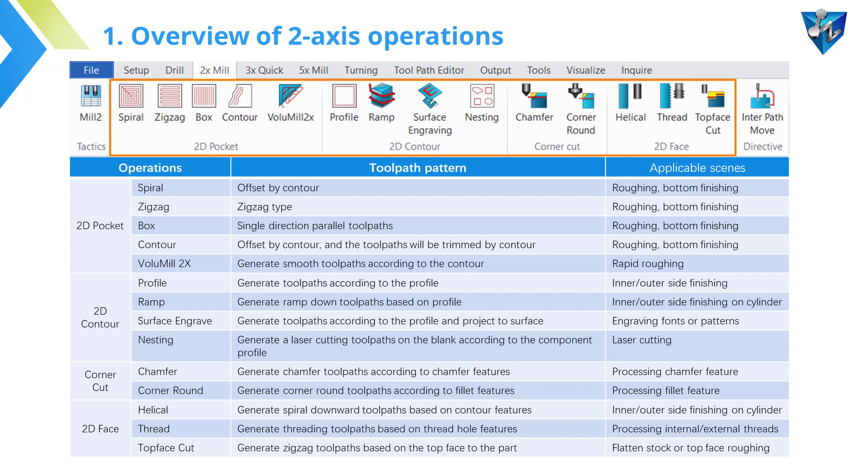In the second chapter, I will introduce the toolpath patterns of ZW3D 2X-CAM. The first category is 2D pocket operations: spiral, zigzag, box, contour, and VoluMill 2X. Most of them are applicable for 2X roughing and bottom finishing, and VoluMill 2X is only for 2X roughing.

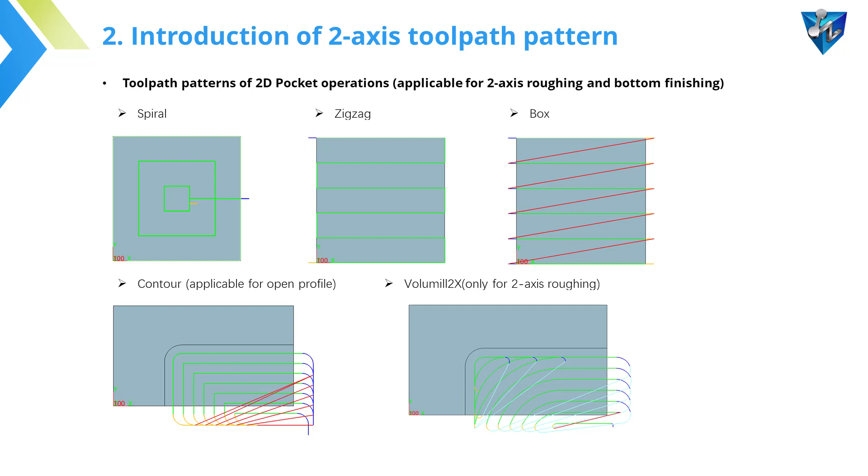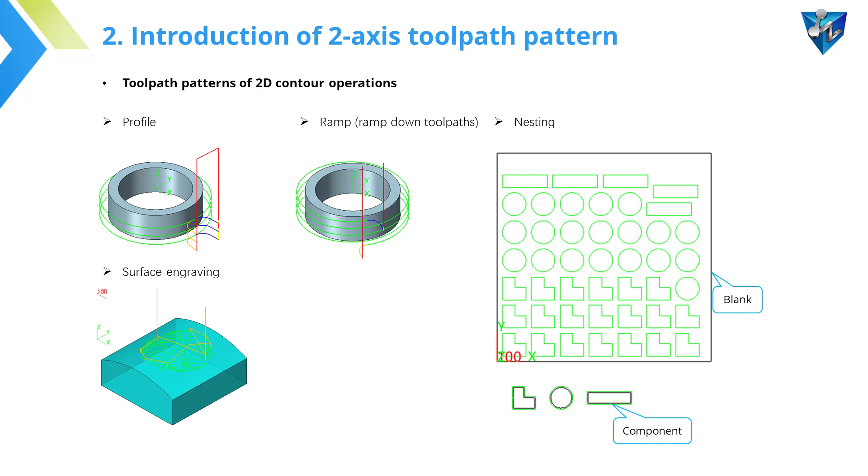The second category is 2D contour operations: profile, ramp, nesting, and surface engraving. Then the last 2 categories are corner cut operations, which contains chamfer and corner round cut, and 2D face operations, which contains helical, thread, and top face cut.

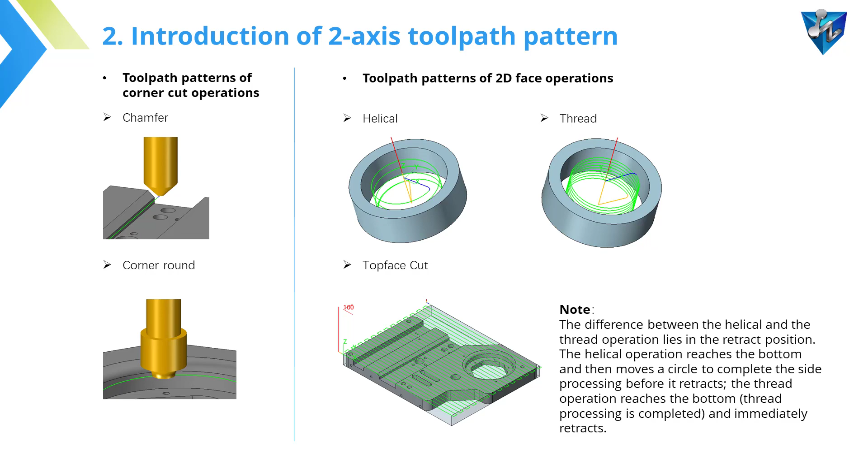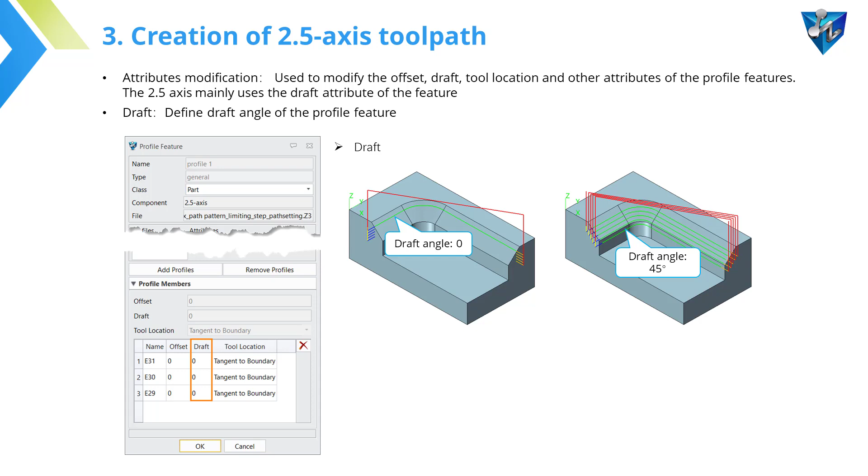In the third chapter, I will introduce how to create a 2.5-axis toolpath in ZW3D. It's achieved by modifying the attributes of the profile features. Now let's go to ZW3D and introduce the details.

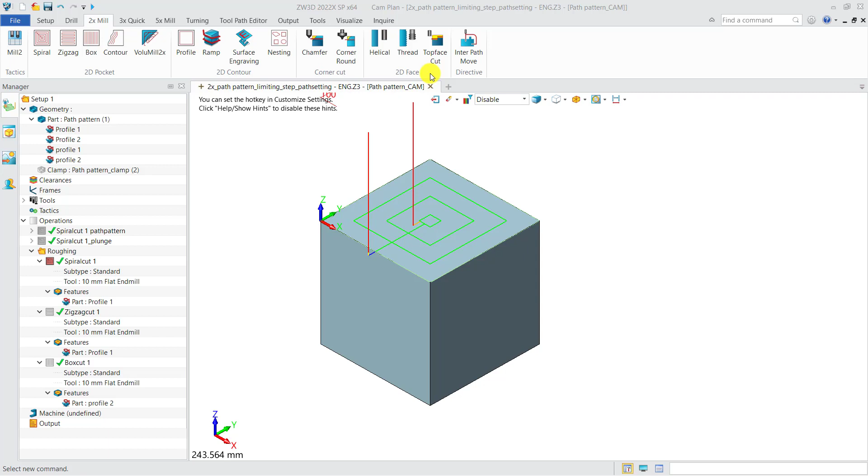These are the operations of ZW3D 2X-CAM. Here are the 2D pocket operations, 2D contour operations, corner cut operations, and 2D face operations. Then I will introduce the toolpath patterns one by one.

First is the spiral cut. It generates the toolpath by offsetting the profile. It can process toward or away from the profile boundary. Just set the toolpath pattern option we introduced before.

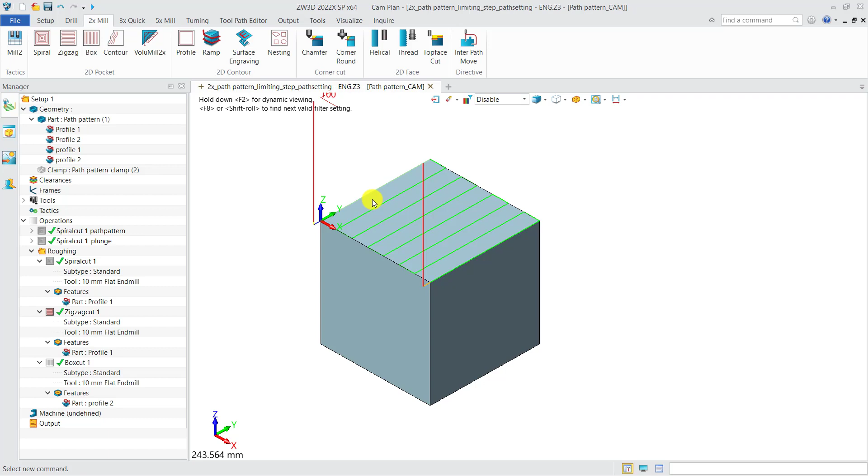Then is zigzag cut. It will generate straight parallel toolpath and process in zigzag shape. And box cut. It will also generate straight parallel 2 pass, but instead of zigzag shape, it will lift tool at the end of every toolpath, then move to the start point of next toolpath.

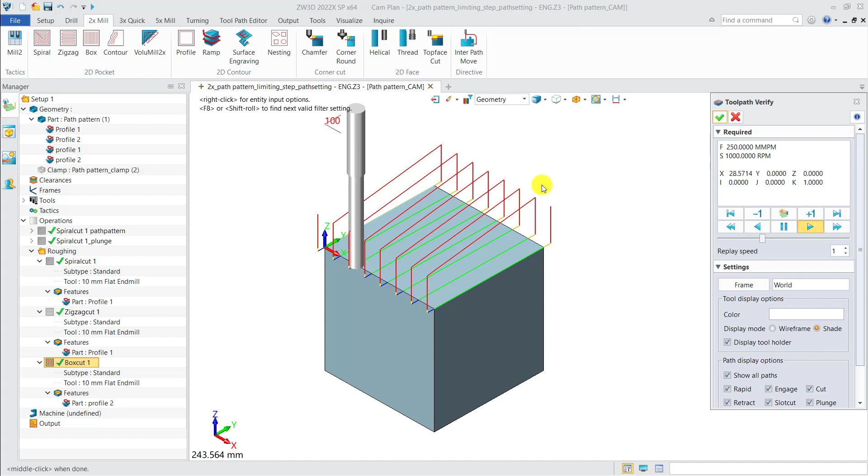Next one is contour cut. It will generate the toolpath by offsetting the contour, and the toolpath will be trimmed by the open contours and generate lead in and lead out toolpath.

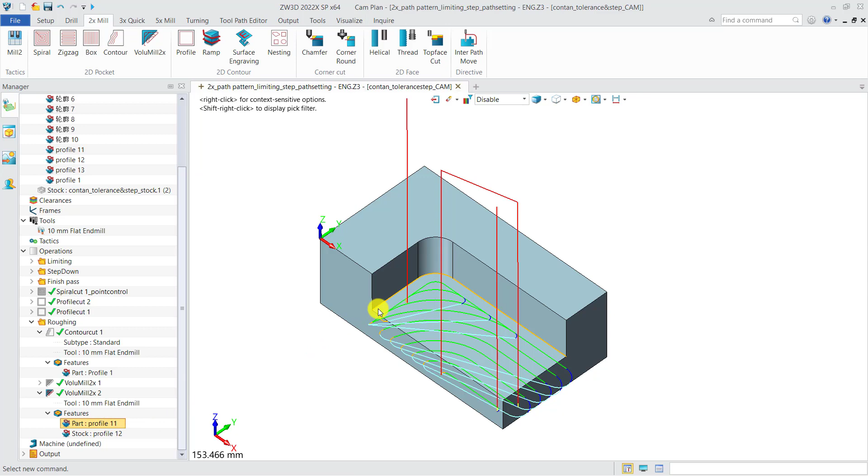And VoluMill2x. It will generate smooth toolpath according to the contour, and according to the parameters recommended by technology expert. Use a large step down to remove material.

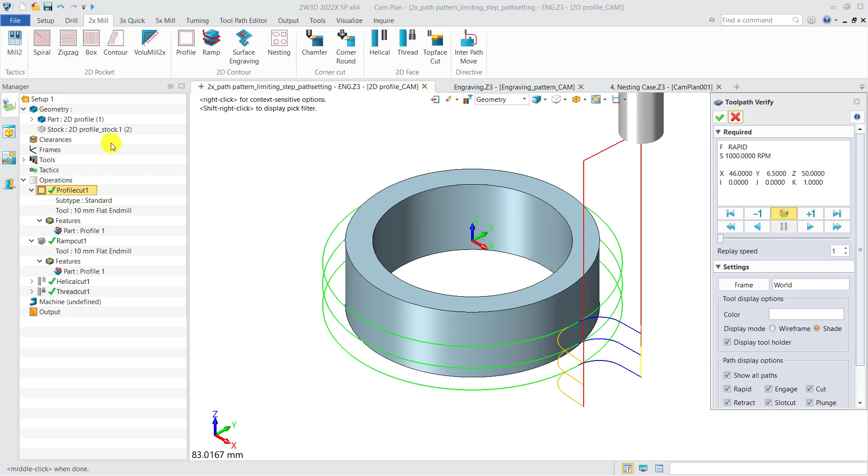Then next category is 2D contour operations. Profile cut will generate the toolpath according to the profile. It has lead in and lead out at every layer, and it is applicable for inner or outer side finishing, because it will process with the tool cutting edge.

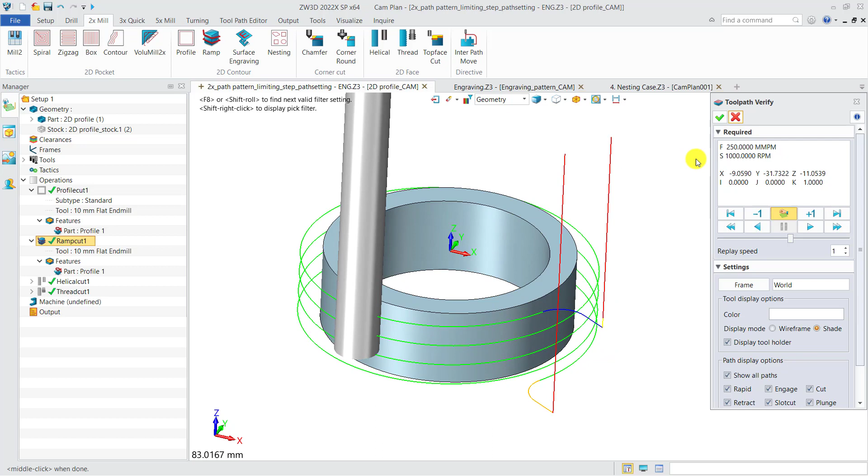Ramp cut will generate ramp down toolpath based on profile, without tool lifting in the middle, and it will also process with the tool cutting edge. It is applicable for inner or outer side finishing on cylinder.

Then the next one is surface engraving. It will generate the toolpaths on the selected profile, then project them on the model surface to generate the engraving toolpaths.

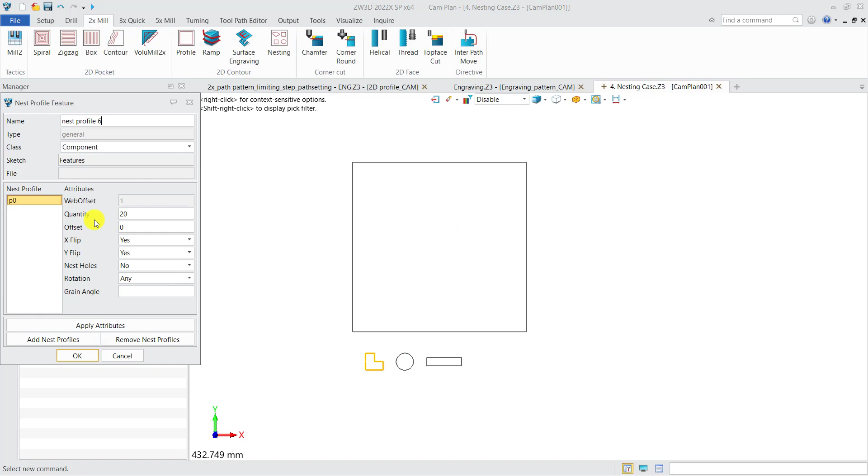And the last operation in 2D contour category is nesting. It will generate toolpaths according to the specified component shape and quantities on the blank feature.

The next category is corner cut. It's mainly used for chamfering and rounding features of the workpiece. First is the chamfer cut.

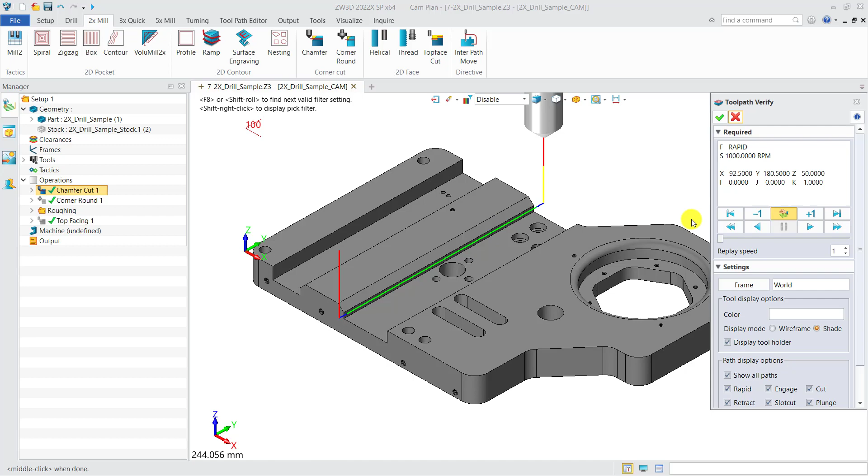We can use Verify to check the effect. It's using the chamfer tool. And of course, it can generate multiple toolpaths. For example, I change the number of cut to 3.

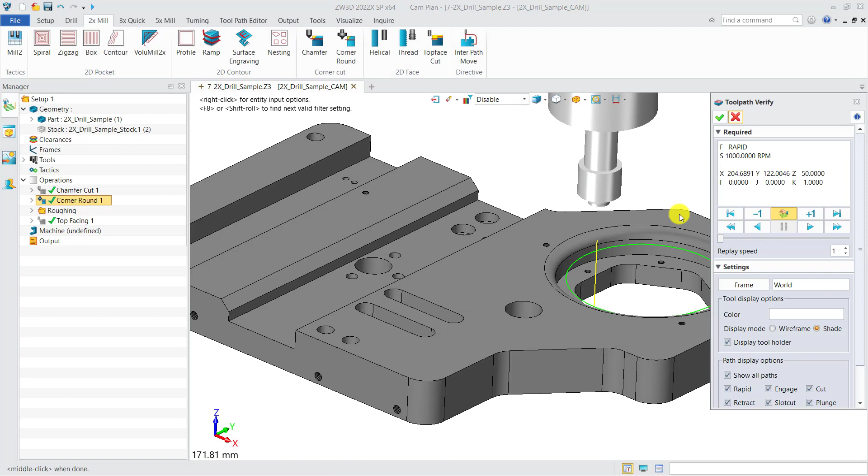Next is the corner round cut. We can also use Verify to check the effect. It's using the corner round end mill to process the fillets.

Then the last category is the 2D face. It contains helical, thread, and top face cut. Firstly, let's look at the helical cut.

It's applicable for inner or outer side finishing on cylinders. The toolpath is actually a helix. The distance between toolpaths in Z direction is defined by pitch value here.

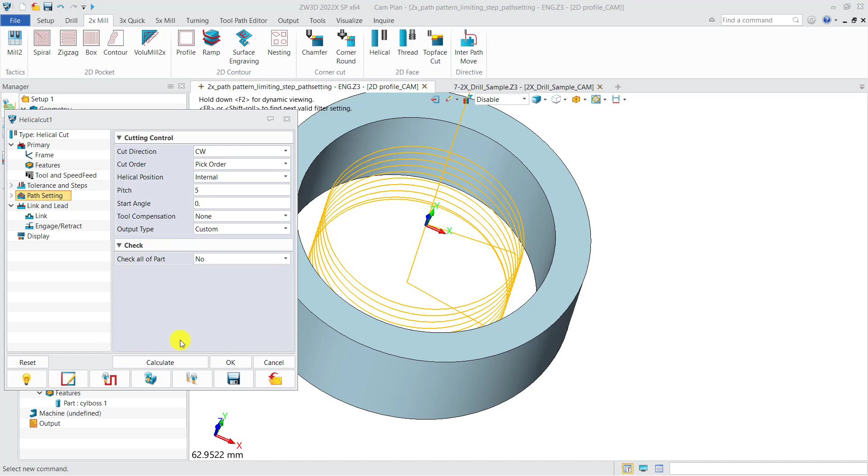Next one is thread cut. As its name suggests, it's used to process the threads. It will generate the toolpaths based on the thread pitch specified in the feature dialog box.

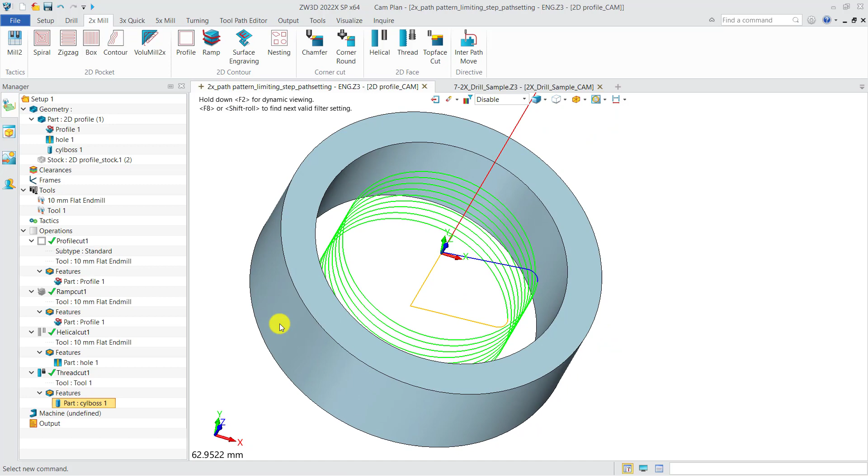These two operations' toolpaths are similar. The difference between them lies in the retract position. The thread operation reaches the bottom, the thread processing is complete, and it immediately retracts. However, the helical operation reaches the bottom and then moves a circle to complete the side processing before it retracts.

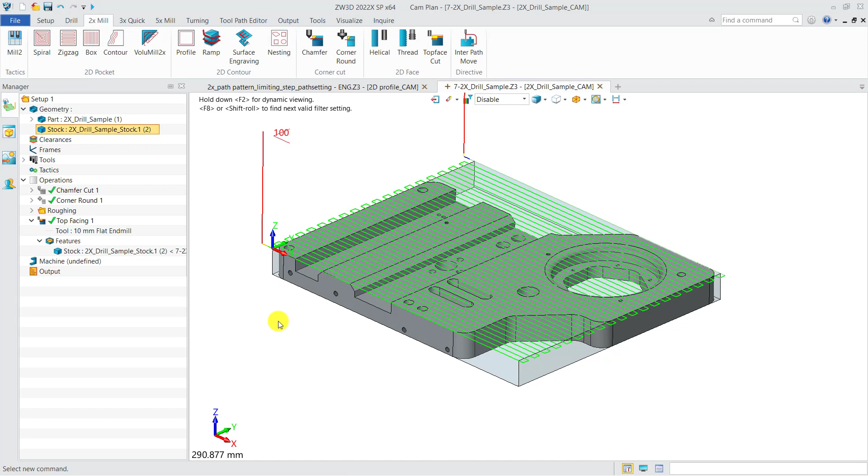And the last operation is top face cut. It's normally used to flatten stock or top face roughing. The default pattern is zigzag. You can also change the toolpath pattern in path setting.

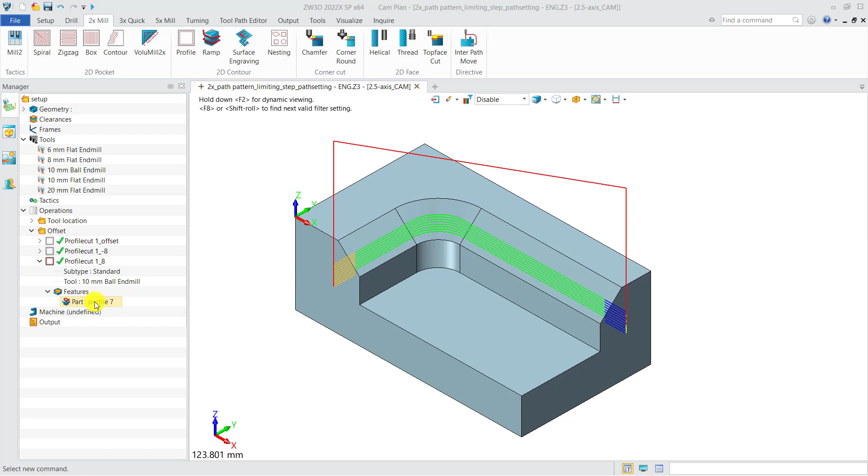Next, I will introduce how to create 2.5X toolpaths. Here is an example. Now I want to process this slope. As usual, we create a profile, create tool, and specify top and bottom points. But you will see the toolpaths is not correct.

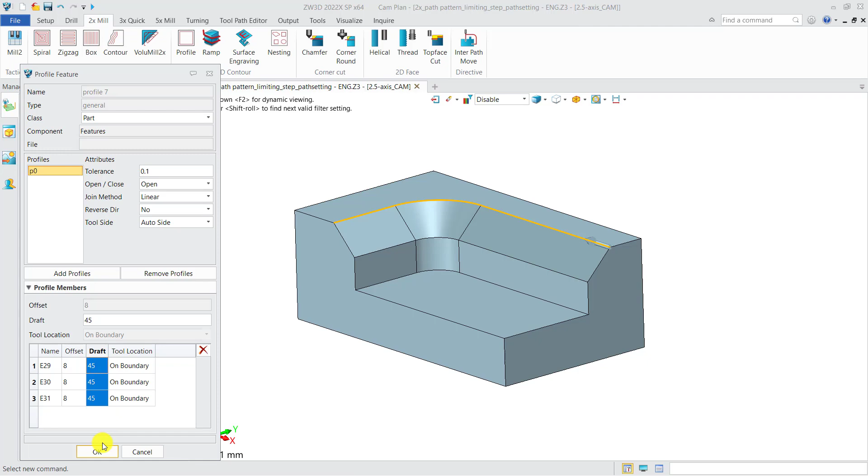To create the expected toolpaths, we can go to Profile Feature dialog box, set the draft value to 45 degrees, which is the angle of this slope, and calculate. The toolpaths will generate with the draft angle.

So that's all for the introduction of operations in ZW3D 2X CAM. Thank you.